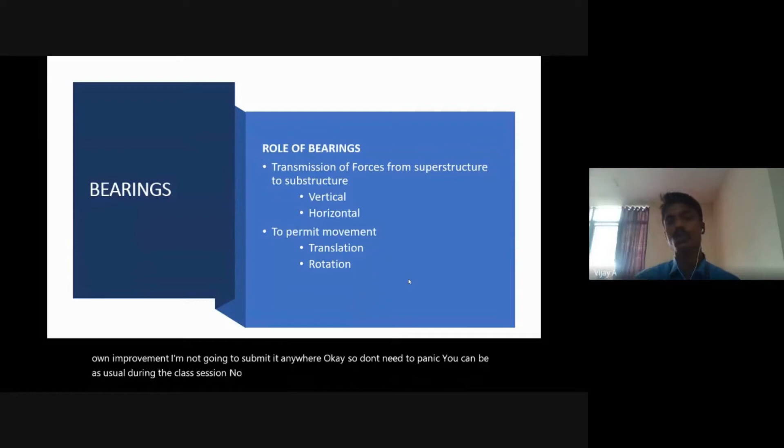The role of bearings is transmission of forces from superstructure to substructure. Here the bearing acts as an intermediate between your girders and the piers. The bearings can be placed vertical or horizontal, and it helps in permitting the movement of your girders in translation or rotation.

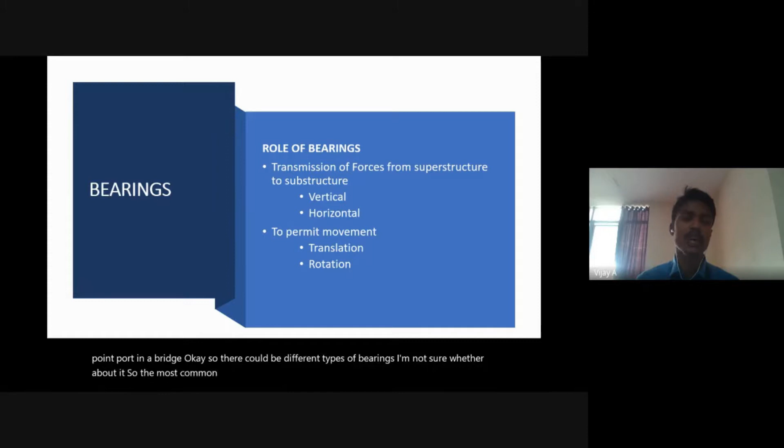This is actually one of the most important parts in a bridge. There could be different types of bearings. The most common types we use in bridge structures are sliding bearings, roller and rocker bearings, elastomeric bearings, and the recent advanced bearing is PTFE, polytetrafluoroethylene. It's a type of rubber which has a very good ductile content in it.

Elastomeric bearings are used in other structures as well, especially for base isolation. These are the different types, and oil bath bearings are not used in current infrastructure methods. So now, inspection of bearings.

These are very important points that you must be knowing. The inspection of steel bearings is very important in regular maintenance of bridges, especially steel bridges, because when corrosion takes place at girder level or deck slab level, it is obviously going to affect your bearings as well.

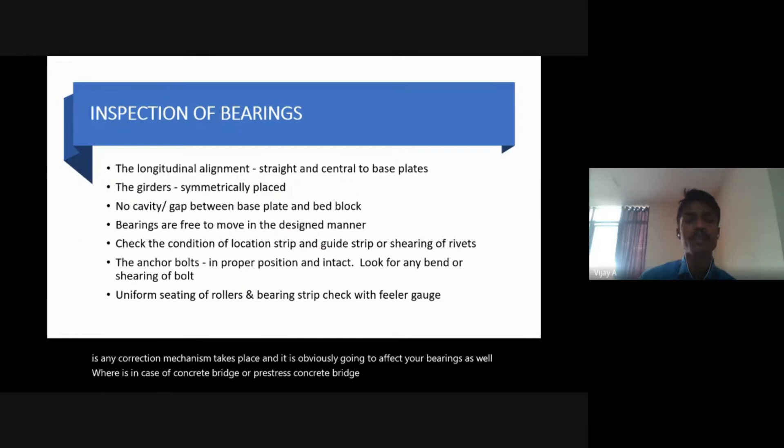Whereas in case of concrete bridge or pre-stressed concrete bridge, the bearing is a different material, whereas your girders and piers are made up of different composites. That will of course have an effect, but comparatively to your steel bridge where both bearings and girders are made up of steel and integrated together, so at that point the cost will be very large.

Particularly, the bearings of all girder bridges should generally be cleaned and greased once in every 2 to 3 years. It's not beyond 2 years, at least for 2 years you have to check and maintain.

In case of a bridge that carries long welded rails, when you go for uniting two different rails or two different girders, in that scenario we will be using long welded rails, we call it LWR. At that point, the sliding bearing shall be inspected, especially during March when the summer season is about to start, and during October when the winter season is about to start.

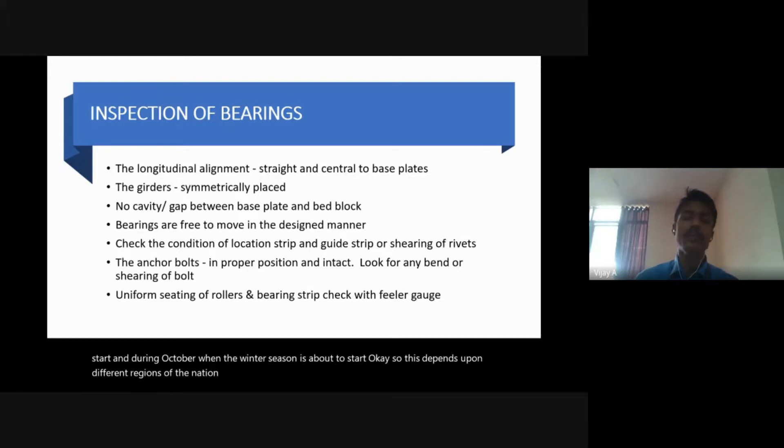This depends upon different regions of the nation. Any foreign materials available in the bearings must be cleaned, and then you have to apply for greasing. The lubrication of the bearing shall be done once in 2 years.

Especially for railway bridges, we have an organization called RDSO, Research Design and Standards Organization. It is an R&D organization that comes under the Ministry of Railways of India, which functions as a technical advisor and consultant to the Indian Railways. For example, in India we have a separate organization called BPRD, Bureau of Police Research and Development, which takes care of modernization of police forces.

What are the different reforms that has to be done? We have a dedicated police force, and a team to monitor different types of weapons as well. But you have an institution called BPRD, Bureau of Police Research and Development, which takes care of modernization of the police force.

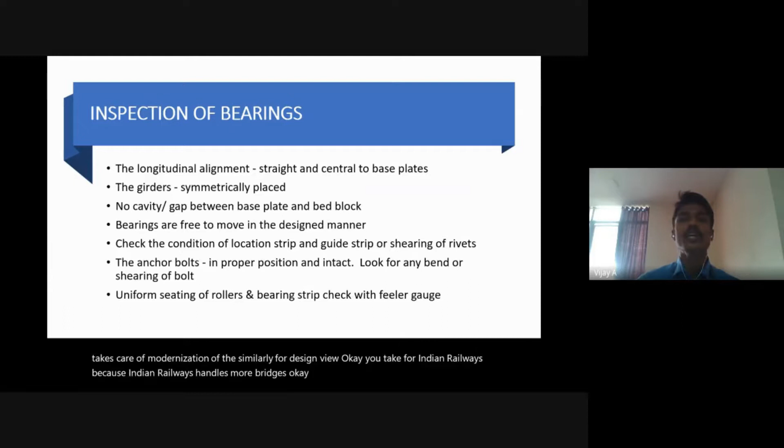Similarly, for Indian Railways, because Indian Railways handles more bridges, especially steel bridges, they have their own organization called Research Design and Standards Organization. This organization frames different policies, especially structural design policies, bridge maintenance and rail maintenance policies that help the Indian Railways. So bearings must be taken care of as adhering to RDSO principles.

Sliding bearings should be inspected for major reasons like oiling and greasing of bearings, which must be required to be done at least once in 2 years to ensure proper functioning.

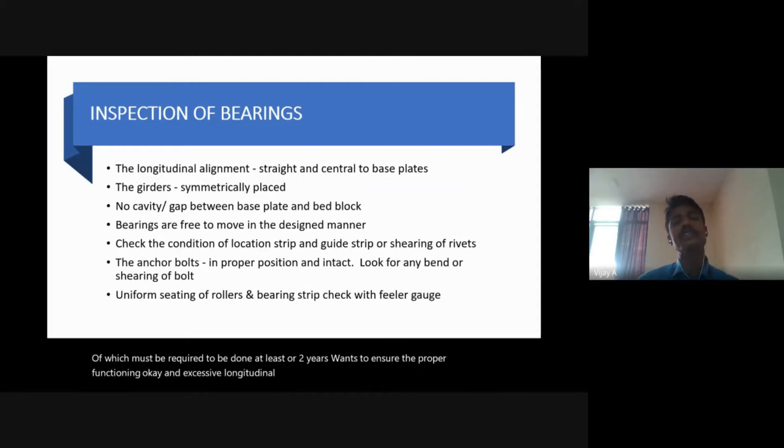Excessive longitudinal movements of the superstructure result in shearing of location strips as well as anchor bolts that connect the base plate.

In such cases, we sometimes use phosphor bronze sliding bearings, which are periodically used especially for hill regions where rails made of steel are connected through timber sleepers. In case of concrete and timber sleepers, the behavior and effect between railway rails and the sleeper differs depending on the material content.

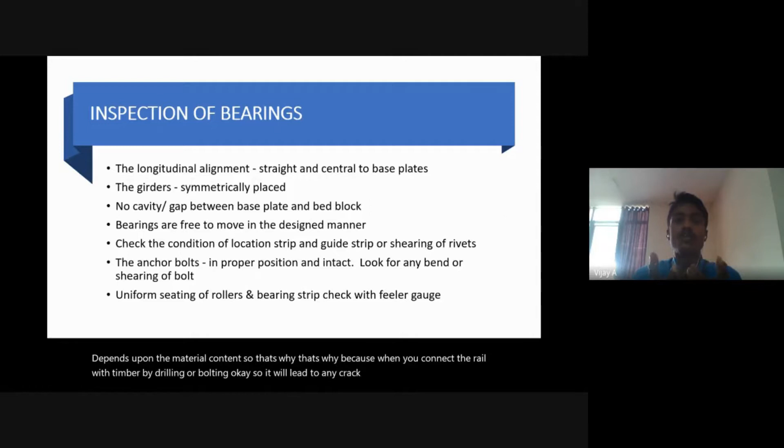In case of timber, connecting the rail by drilling or bolting can lead to cracks or enlarged openings in the timber, which leads to water percolation or penetration. In such scenarios, we use phosphor bronze sliding bearings, which, in case of any cracks, get well compacted such that they get sealed off. This kind of bronze sliding bearing is used as per RDSO principles.

Many times a uniform contact between the bottom face of the bed plate and top surface of the bed block is not ensured, resulting in a gap at certain locations of the railway bridges. This leads to transfer of excessive impact forces to the bed block under live load, and may lead to crack and crushing of the bed block under the masonry constructed underneath the bridges, especially arch type bridges.

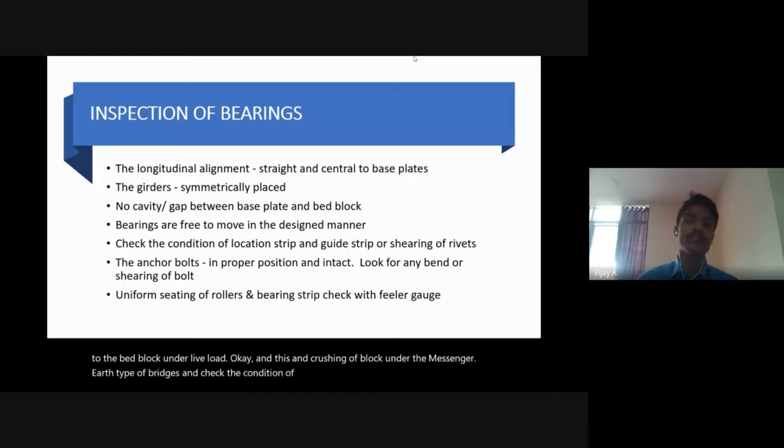Check the condition of the location strip and guide strip, or shearing of rivets, and the anchor bolts for proper position and intactness. Look for any bend or shearing of bolt, and then uniform seating of rollers and bearing strip. Check with a feeler gauge.

In case of flat bearings, we have a different type called flat bearings. The girder is lifted a little over 6 mm. The bearing surface is cleaned with kerosene oil and a mixture of black oil, grease, and graphite in a working proportion.

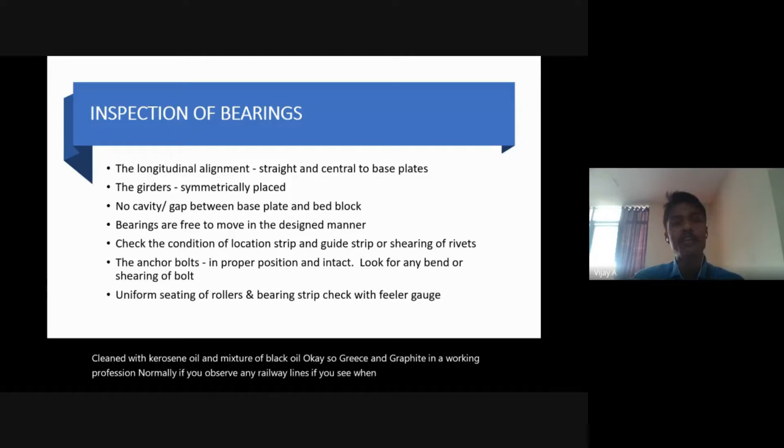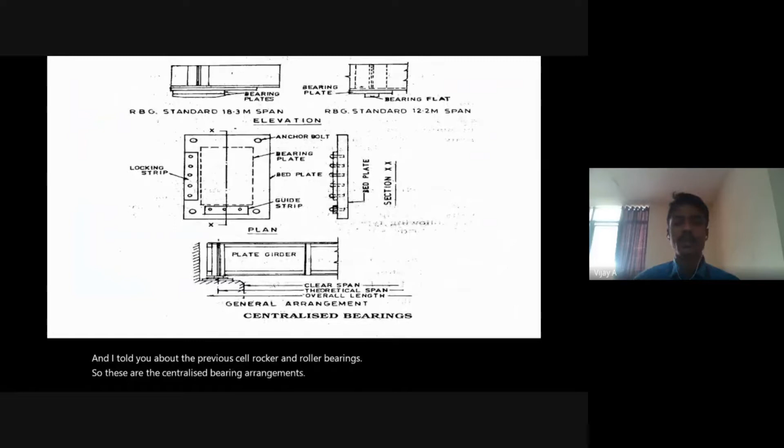As I mentioned earlier about rocker and roller bearings, these are the centralized bearing arrangements. Coming to the roller and rocker bearing, this type of bearing is lifted from its position by adequate slinging.

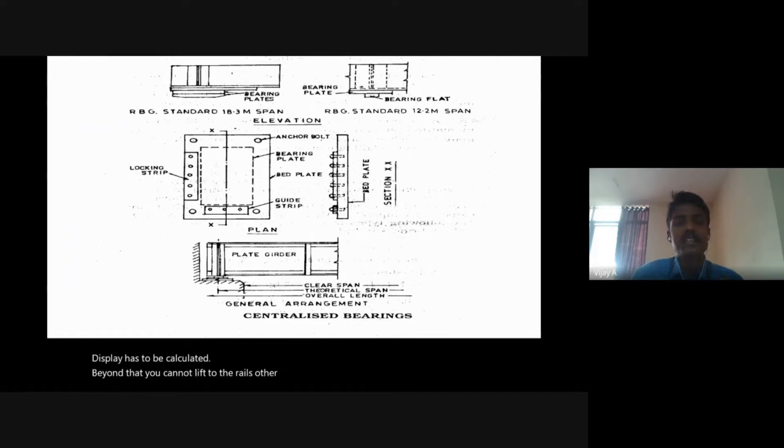Slinging means that during maintenance of such bearings, you tie a cable along the rails and lift it up to some extent so that the bearings can be changed. The lifting force and the displacement have to be calculated, and beyond that limit you cannot lift the rails, otherwise it will displace the entire configuration of the permanent way.

In that case, the bearings are scraped or polished with zero grade sandpaper, and graphite of sufficient quantity is applied evenly over the bearings or rocker and rollers to keep surfaces very smooth, before the bearings are lowered back to their original position.

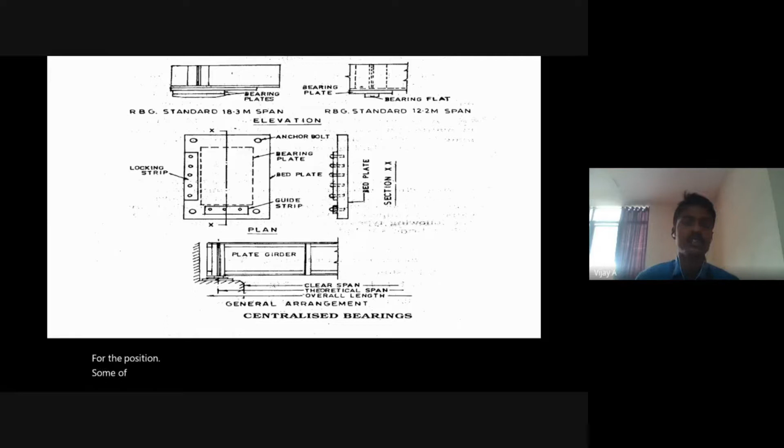We have certain pins, for example in some steel structures, especially at cycles or at home, at the end of a bolt like in ceiling fans, you can see what we call knuckle pins. During constant or consistent dynamic loads, the bolt may get loosened and there are possibilities it may come out. In such scenarios, we use knuckle pins at the end of the bolt.

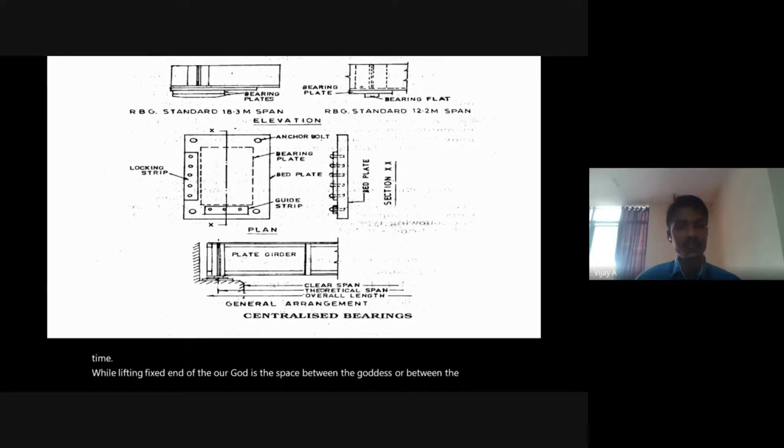We insert a spring within the bolt through a hole, and that is called a knuckle pin. The knuckle pins of both free and fixed ends should also be greased at the time. While lifting fixed ends of the girders, the space between the girders or between the girder and ballast wall at the free ends should be jammed with wedges. This is a very important point.

This is called a slinging operation. When you lift the girder or bearing for maintenance, in some scenarios you will not be lifting it more than 10 mm.

So when you lift it for 10mm, immediately you should not let the crane completely hold it. You should put a wedge underneath. These ends should be jammed with wedges to prevent any longitudinal movement of the girder, right?

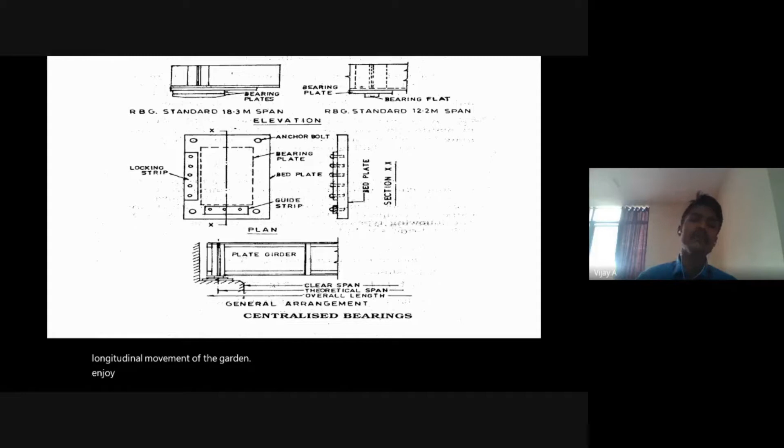In case of segmental rollers, you can observe them in the end joints of the girders. These segmental rollers should be seen placed vertically at mean temperature. This is very important.

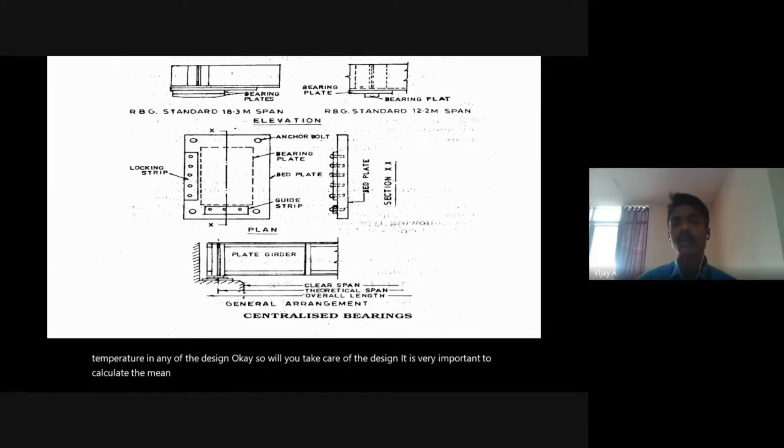In most design cases, we fail to include the mean temperature in the design. So it is very important to calculate the mean temperature. Mean temperature is nothing but, for a particular location, for example if you are going to construct a foot over bridge at Potheri railway station, you have to take the mean temperature of that location for the past 100 years. Based upon the mean temperature, we apply it to the structure and calculate the thermal stresses.

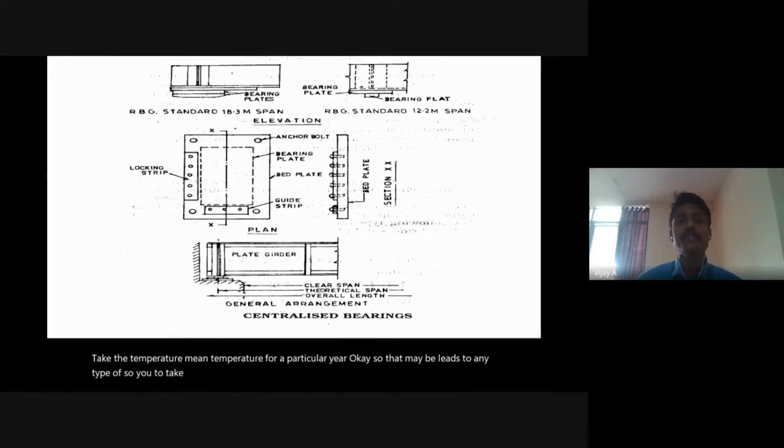This is how the design must be worked out. So this is a point I wanted to tell you. When you calculate thermal stresses, you don't just take the mean temperature for a particular year, as that may lead to failure. You have to take minimum, maximum, as well as average mean temperature for your design consideration over the past 100 years. That is why we require to calculate mean temperature. This is common for any type of structure, not only bridges.

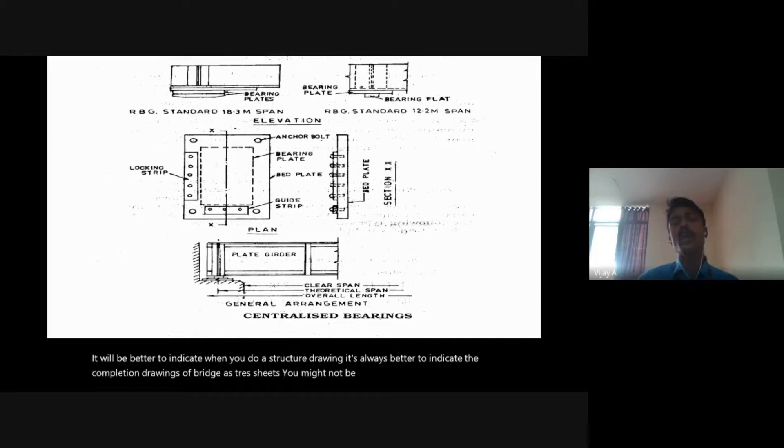It will be better to indicate, when you do a structural drawing, it's always better to indicate the completion drawings of bridge stress sheets. You might not have heard about this kind of sheets. As a structural engineer, when you go into the field, we take care of AutoCAD drawings where we draft the building structure, plans, sections, and then we go for structural drawings where we give detailing and all.

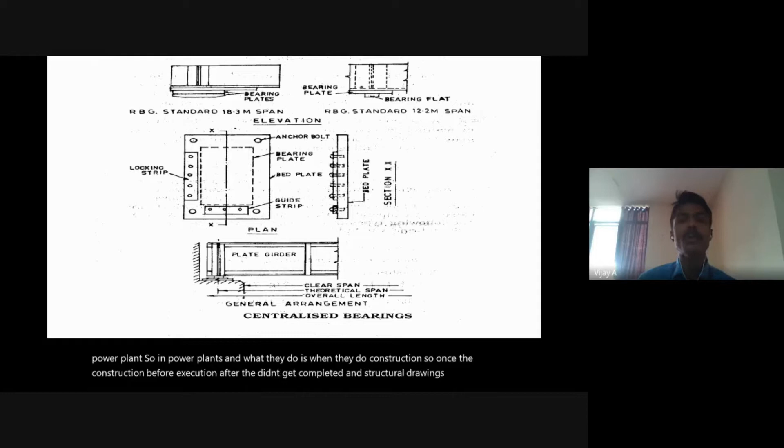In infrastructure based projects, I came to know about these stress sheets from a project at Kudankulam nuclear power plant. In power plants, once the construction design gets completed and structural drawings are drafted, before execution they immediately go for stress sheets. What a stress sheet does is take all the critical locations of the structure, and for that structure they reflect the shear force and bending moment at different points for actual live load and for accidental loads. These are called stress sheets.

Here you can see, at the bottom of the plate girder, the clear span, the theoretical span, and overall length. So can any of you tell what is clear span and what is theoretical span?

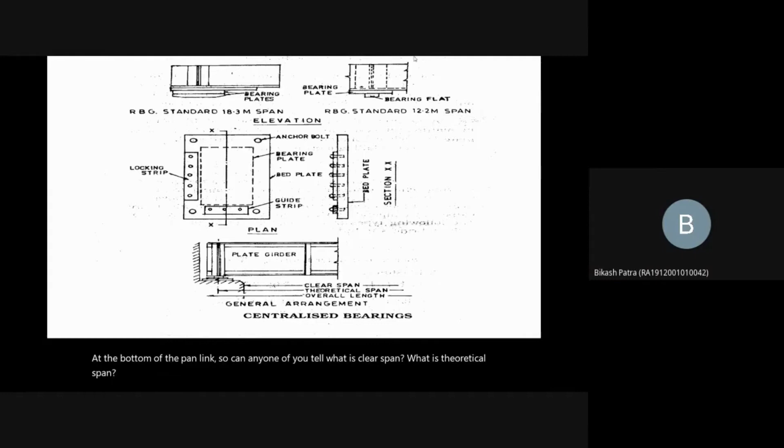Clear span is from one abutment to another abutment midpoint, you can say. Theoretical span is from abutment midpoint to another abutment midpoint. That's correct.

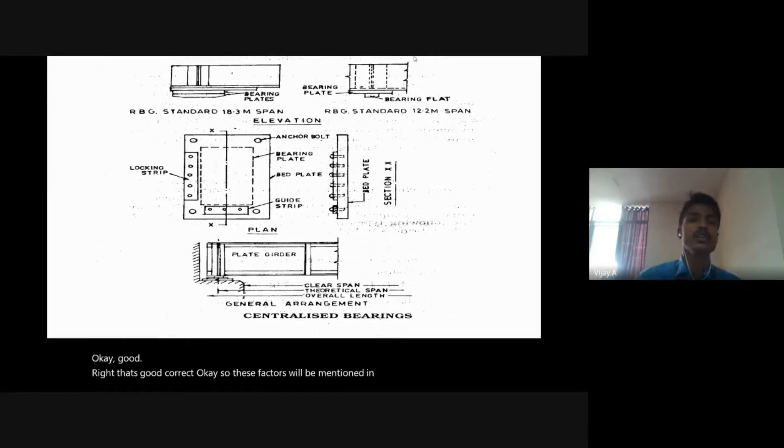These factors will be mentioned in your stress sheets. You will be calculating from midpoint to midpoint and how it reacts for live load and additional accidental loads. Then we take it from one end to another end, and at that point, how the girder reacts. So these kinds of scenarios will be taken care of. That is where we concentrate on stress.

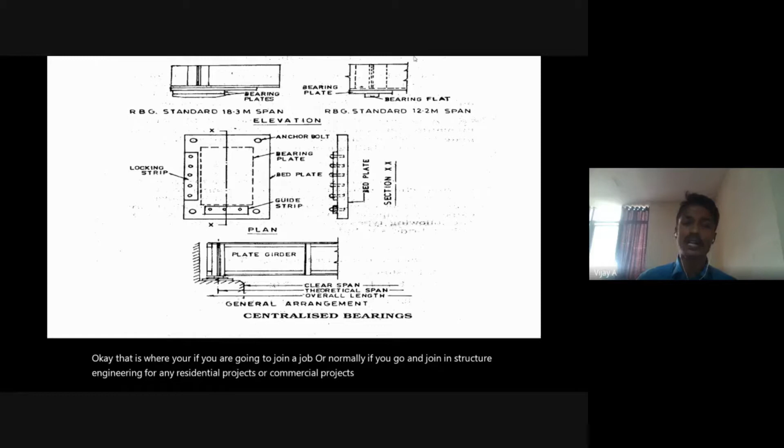Suppose even after your M.Tech in structural engineering, if you go and join a job for residential or commercial projects, in that scenario I guess you may not be exposed to stress sheets. But when you get into infrastructure based projects, especially bridges, nuclear reactors, or telecommunication tower construction, in that scenario you will be very well exposed to stress sheets.

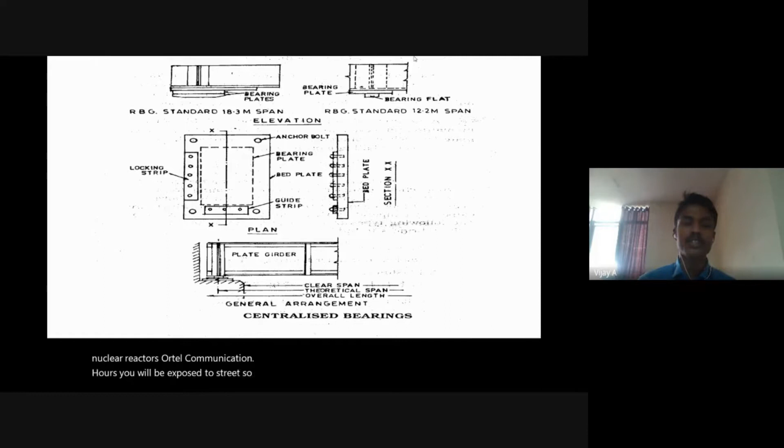So keep in mind that the span mentioned in stress sheets will have both clear span reactions as well as theoretical span reactions. Then you have to take care of the maintenance of arch bridges very effectively, because in most railway bridges we take care of arch bridges.

Okay, so these are the different components of arch bridges. I will explain the maintenance of these arch bridges, and then again I will come to different types of bearings because I told you about PTFE bearings and all. You should know about what are PTFE bearings, what are elastomeric bearings, and what are its functions. This kind of things you must be knowing.

Coming to arch bridges, most of them are very old. In fact, in India in current scenario, we actually go for pre-stressed girder bridges or steel girder bridges, and sometimes suspension cable bridges where long span is required. For arch bridges you require more skillful labor in constructing the arches and all. That is why we avoid such kind of bridges in infrastructure.

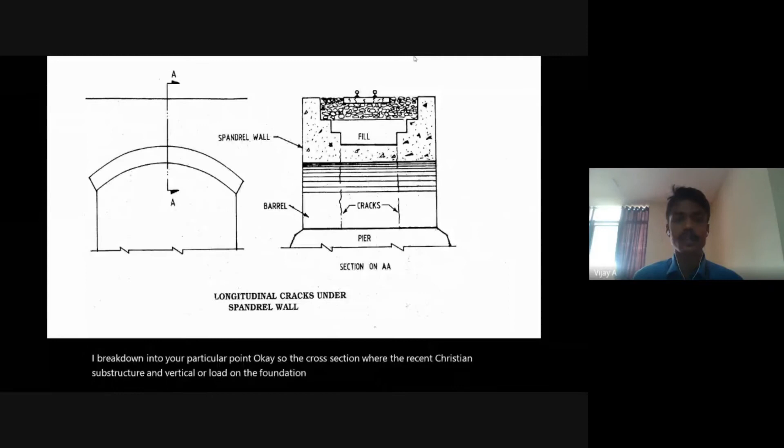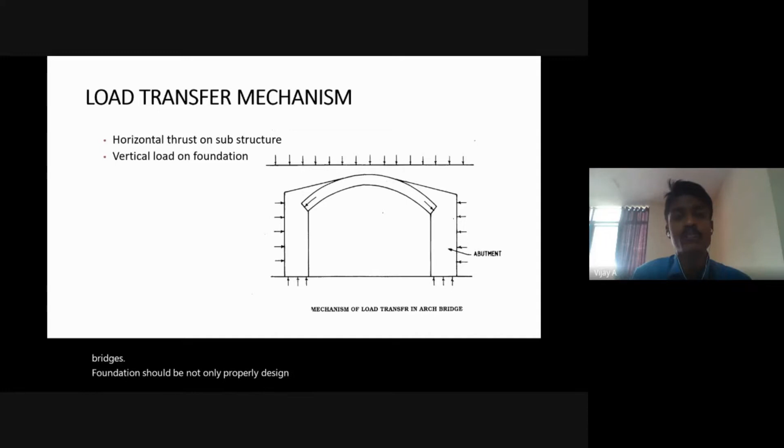From this figure, you can easily conclude that soundness of foundation is extremely important in arch bridges. Of course, foundation is very important for any building, but in case of arch bridges, the foundation should not only be properly designed, but also the material used for construction of the foundation must be very sound. This fact must be borne in mind not only during inspection but also in executing work such as jacketing of piers and abutments of arch bridges.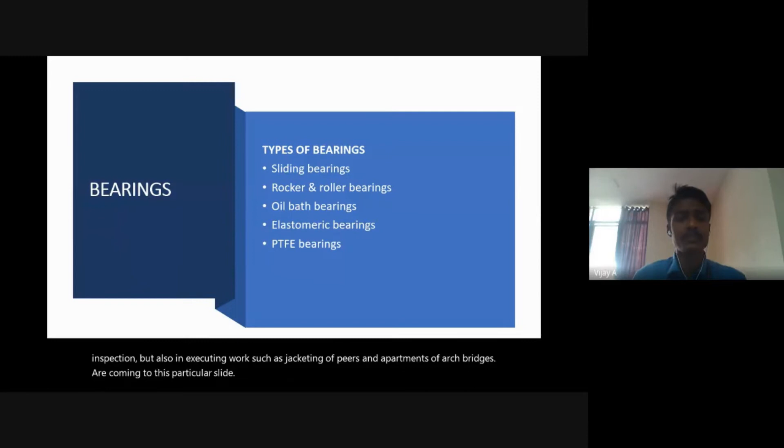Coming to this slide, you have various types of bearings, and as a structural engineer, you should be aware of what these different bearings take care of. Coming specially to elastomeric bearings, as I said, these we will be using in base isolations, right?

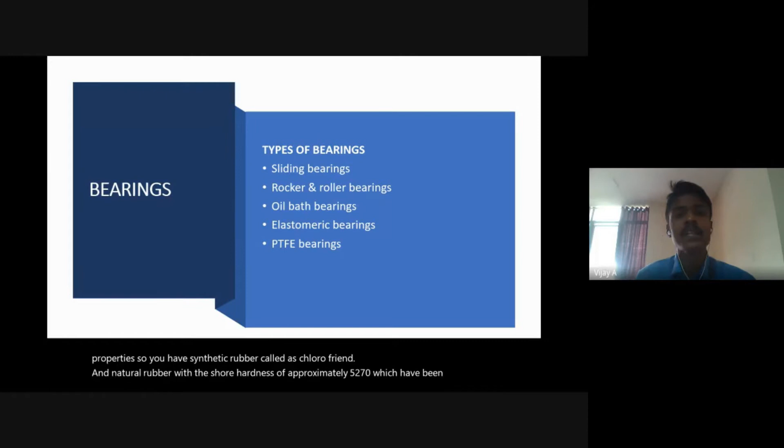These elastomers are nothing but polymers with rubber-like properties. So you have a synthetic rubber called chloroprene and natural rubber with a Shore hardness of approximately 50 to 70, which have been extensively used in bridge bearings. Elastomers are, in fact, very stiff in resisting volume change, but also very flexible when subjected to shear or pure uniaxial tension. This is a very important point, guys.

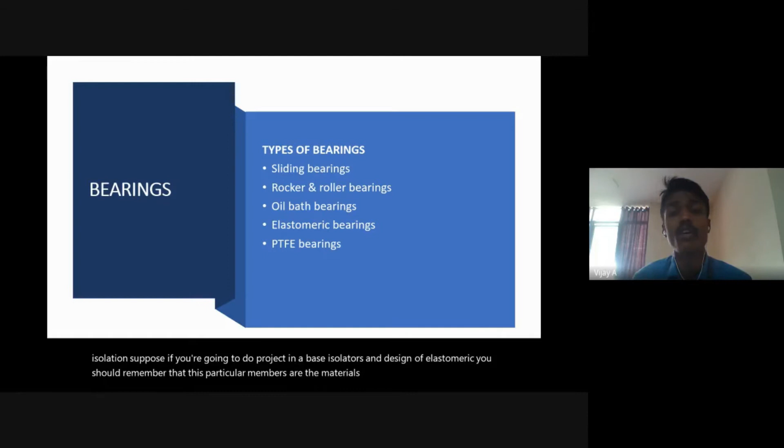Please note, even for base isolation, suppose if you're going to do a project involving base isolators and design of elastomeric bearings, you should remember that this material, the elastomer bearing, has the capacity of very stiffness in resisting volume change. That is why in case of earthquake, it acts as resistance to inertial loads, right?

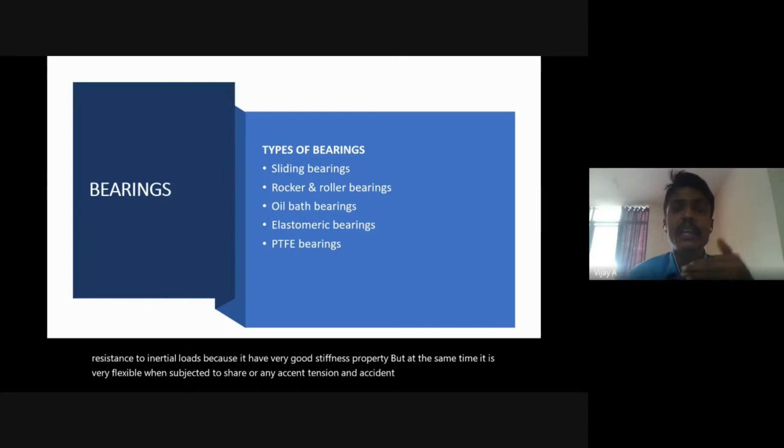Because it has very good stiffness property, but at the same time it is very flexible when subjected to shear or uniaxial tension. So in case inertial forces and accidental loads act simultaneously, it has the capacity to transfer both types of loads at a single time.

Most elastomers are stiffened drastically at low temperatures. Natural rubber stiffens less than chloroprene. Elastomers actually creep under continuously applied stress and are subject to deterioration due to high concentration of ozone or severe chemical environment.

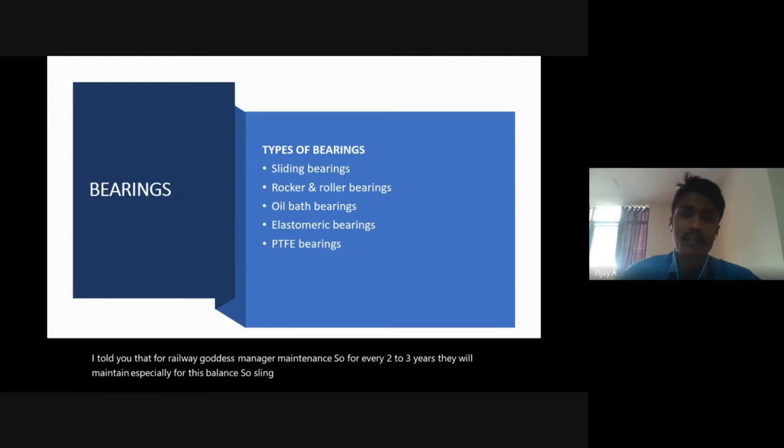That is why I told you that for railway girders, maintenance is done every 2 to 3 years, especially for these bearings. So a slinging operation will be done. We will keep wedges, check for any stresses or deterioration in the bearings, either remove it or repair it, and then release the slinging. This is how you have to maintain the elastomeric bearing.

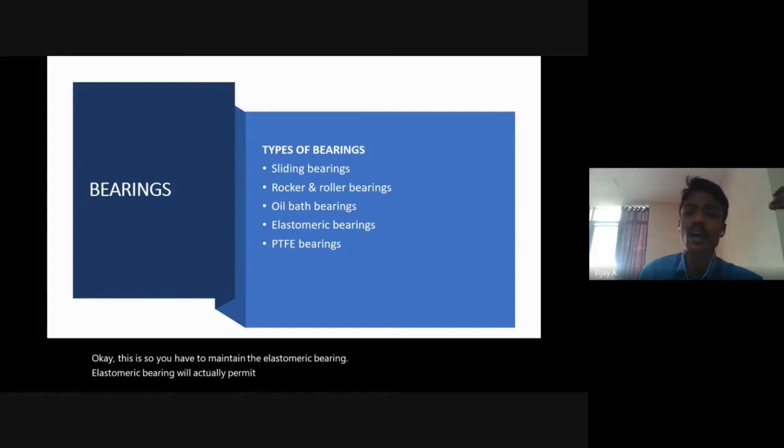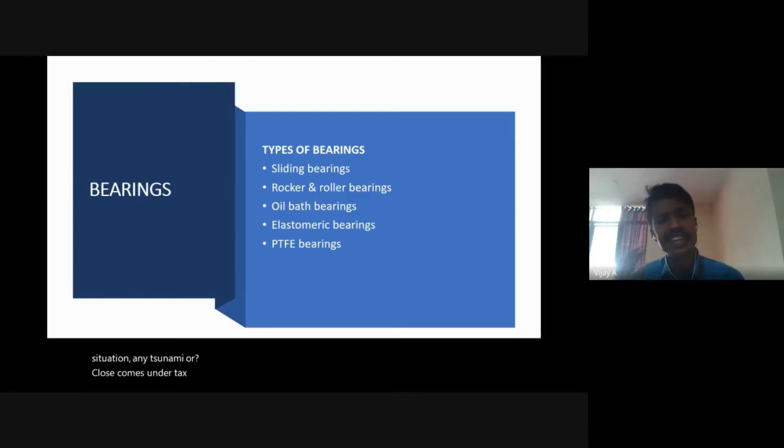Elastomeric bearing will actually permit you to translate along any direction and rotate around any axis. Suppose you imagine a column that connects the foundation and the base of a structure—sorry, the footing and the base of the structure. Between them you are placing an elastomeric bearing. In that situation, in case of earthquake or tsunami or vibration loads attacking the structure, in any direction it has the capacity to transfer the loads.

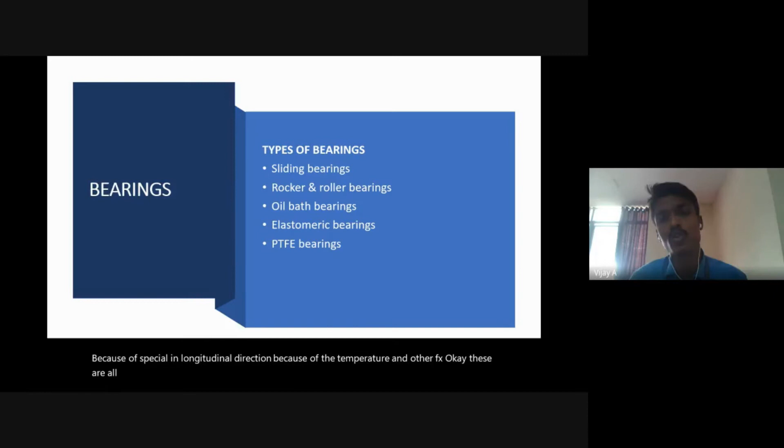The longitudinal movement of the bridge deck due to temperature and other effects is also accommodated up to a certain limit by the shear deformation of the bearing. So when we talk about expansion joints and consider thermal stresses, the girders may be allowed to move, especially in the longitudinal direction, because of temperature and other effects. These are all possible only because of the bearings we use in the structure. Especially elastomeric bearings help very well in transferring the shear deformation caused by these longitudinal movements.

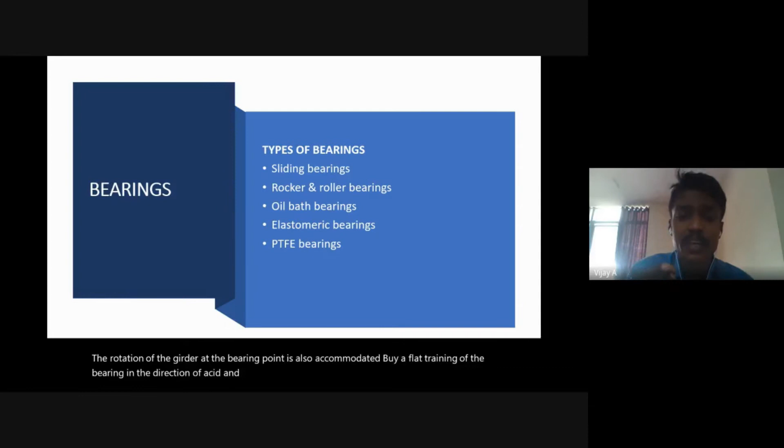The rotation of the girder at the bearing point is also accommodated by a flattening of the bearing in the direction of rotation. As I said, it has very stiffened characteristics, and at the same time very flexible characteristics for shear or uniaxial tension. So when rotation of the girder at the bearing point acts on the bearing, it gets flattened in the direction of rotation.

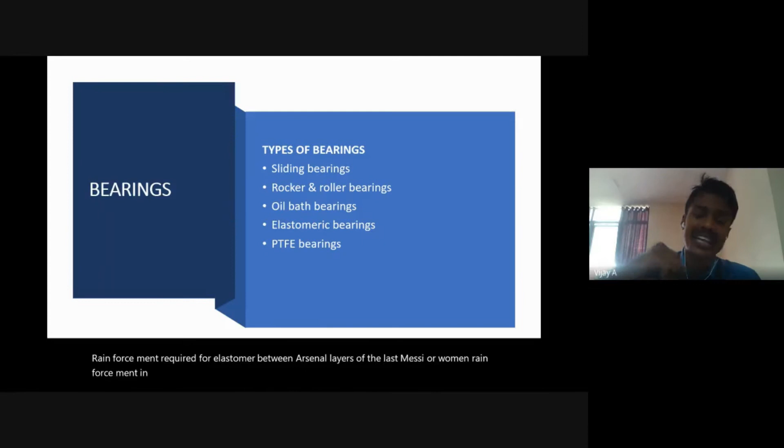So reinforcement may be required—you may provide reinforcement for elastomers between horizontal layers of the elastomer. When I mean reinforcement in elastomeric bearings, we are not going to give any reinforcement bars within the bearings. Instead, we will be using steel reinforcing plates to prevent any outward bulging or splitting under load. The reinforcement for elastomers is required between the horizontal layers.

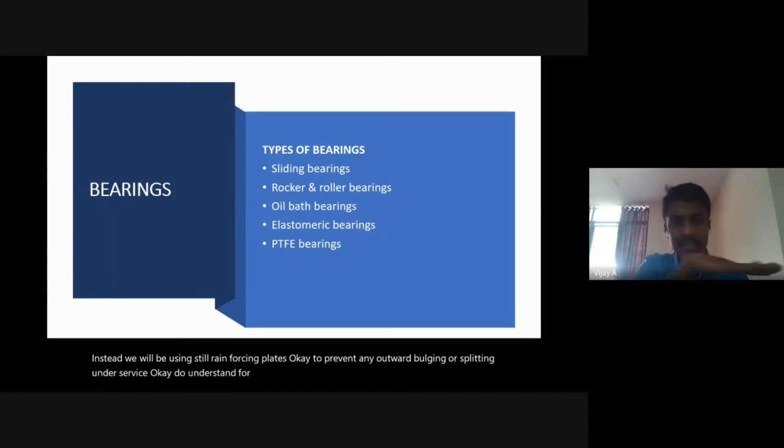Horizontally, if you take the bearing, you will be inserting steel reinforced plates. Why do we require this? To prevent any outward bulging. Suppose it is made up of stiffened rubber—when you apply the load and simultaneously shear force is acting, it will start bulging out; the expansion of rubber takes place. So we use such steel reinforcing plates to prevent any outward bulging or splitting of bearings under service load.

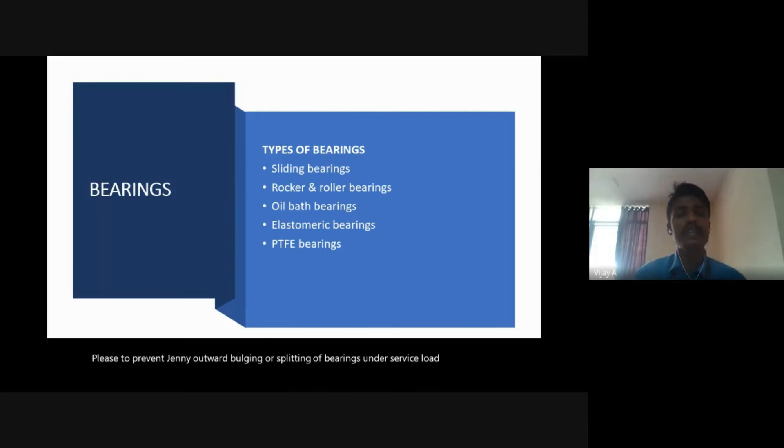The design of elastomeric bearing takes into account the dimensions of the bearing through a term called the shape factor. We have all studied the shape factor. What is the shape factor? It is nothing but the ratio of effective plan area to the force-free surface area, right?

The low values of shape factor should be avoided, since bulging and low elastic modulus are likely to occur in that scenario. When you design elastomeric bearings, if the shape factor is low, you have to avoid that particular design because it will lead to bulging and a very low elastic modulus.

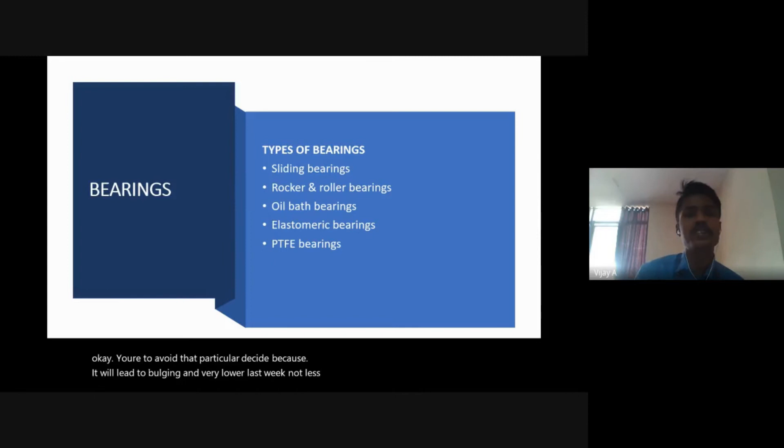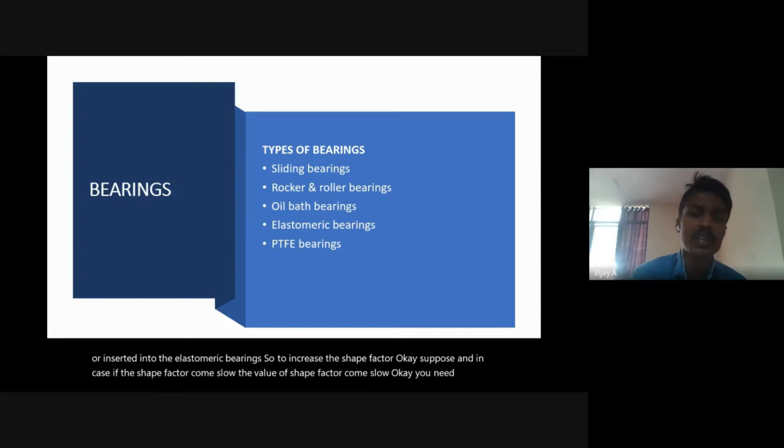Then you'll have closely spaced steel plates inserted into the elastomeric bearing so as to increase the shape factor. So suppose when you design the elastomeric bearing and the shape factor comes out low, you need not discard the design and go ahead with another trial. Instead, you can take into account reinforcement provided in the elastomeric bearing—in that rubber bearing, you can insert steel plates, maybe closely spaced.

This will help you in increasing the shape factor of the elastomeric bearing. The horizontal stiffness is a function of shear modulus and total thickness of the elastomer.

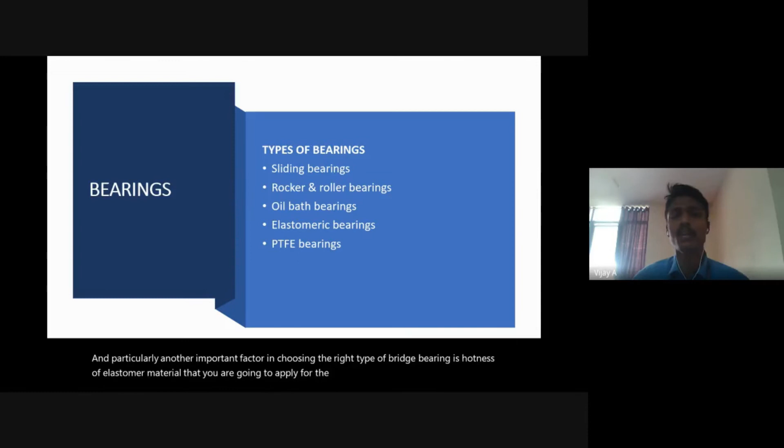Another important factor in choosing the right type of bridge bearing is the hardness of the elastomer material you are going to apply for the particular bridge structure. Every material has a hardness scale, and you have to take the higher limit. This is typically specified as shore hardness and is limited to a maximum value of 70. Higher values of the material result in bearings which are stiffer.

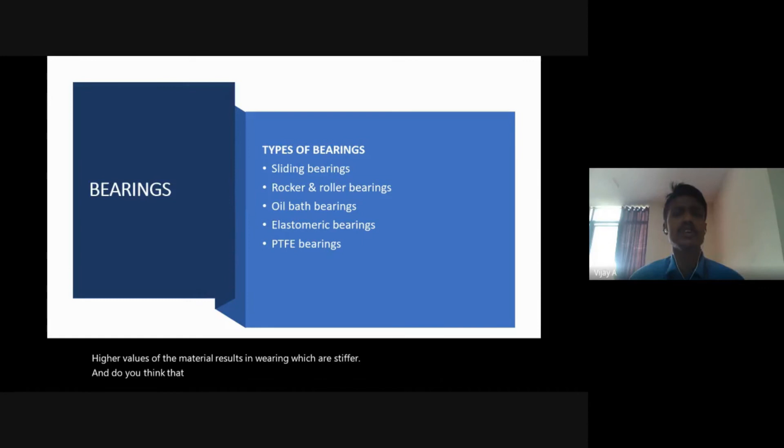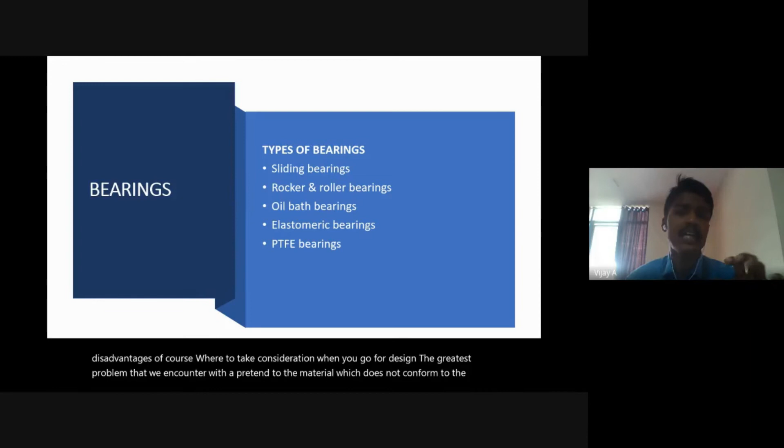Do you think elastomer bearings do not have any negativity? We do have some advantages as well as a few disadvantages, which we have to take into consideration during design. The greatest problem encountered with elastomeric bearings pertains to material which does not conform to specifications, as it may exhibit defects like cracking, splitting, bulging, or tearing of the elastomer due to continuous change in environmental conditions and temperature, since it is a highly hard and stiffer rubber.

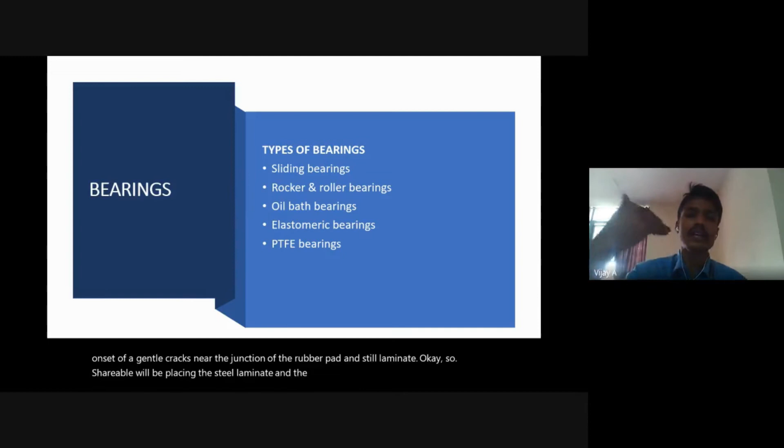The first sign of distress in elastomeric bearings is the onset of horizontal cracks near the junction of the rubber pad and steel laminate. Wherever the steel laminate and rubber pad are placed, at that junction you will have cracks. This is the very first point in noting the requirement of bridge maintenance of the bearings.

The bearing should also be examined for excessive rotation, which is usually indicated by excessive difference in thickness between the back and front of the bearing.

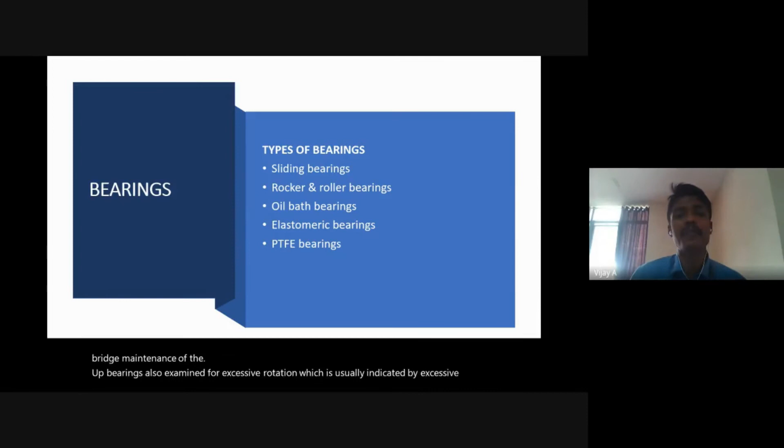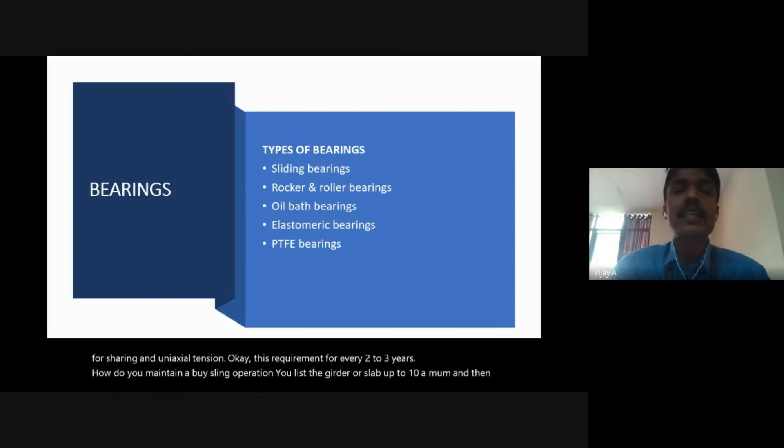These elastomer bearings require maintenance every 2 to 3 years. How do you maintain them? By a slinging operation: you lift the girder or slab up to 10 mm, then apply wedges at the ends. After that, you either go for replacement or repairing of the particular elastomeric bearing.

During the design period, when the shape factor value comes out lower, you need to insert steel plates which help in reinforcing the elastomer bearings, as this will help increase the shape factor of the particular bearing.

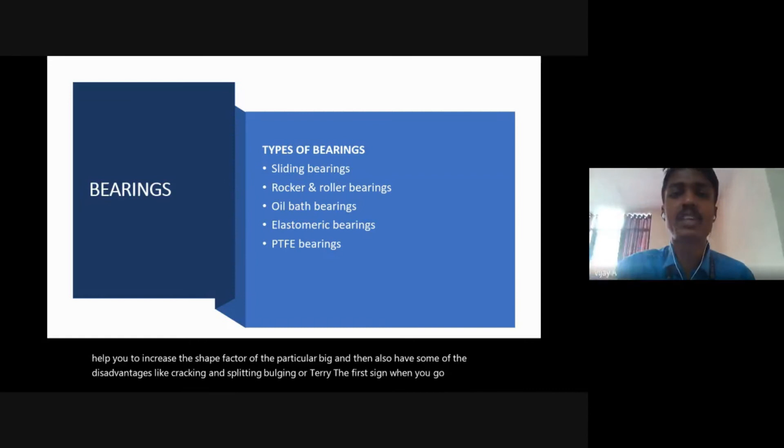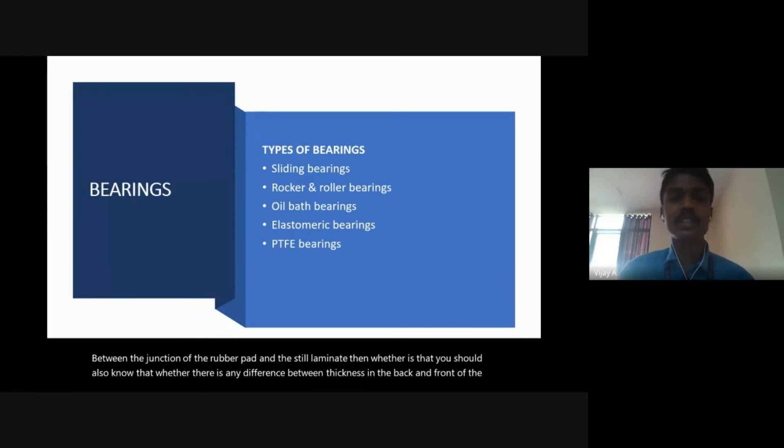Elastomer bearings also have disadvantages like cracking, splitting, bulging, or tearing. The first sign to notice during maintenance is whether any cracks have developed between the junction of the rubber pad and steel laminate, and whether there is any difference in thickness between the back and front of the bearing. These are the important things to note down.

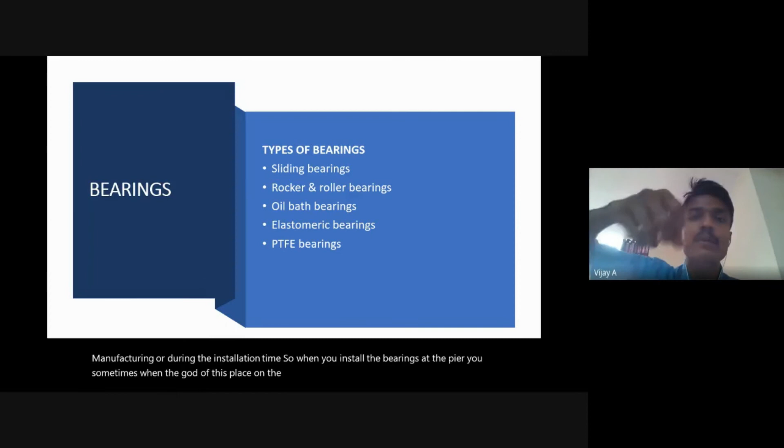Inspection and maintenance also have a few points from my experience that I want to share. Due to possible deficiencies in manufacturing or during installation, when the girder is placed on the bearings, sometimes accidentally more than the calculated force occurs when the lift is removed, so the bearings may start experiencing more stress at that point itself.

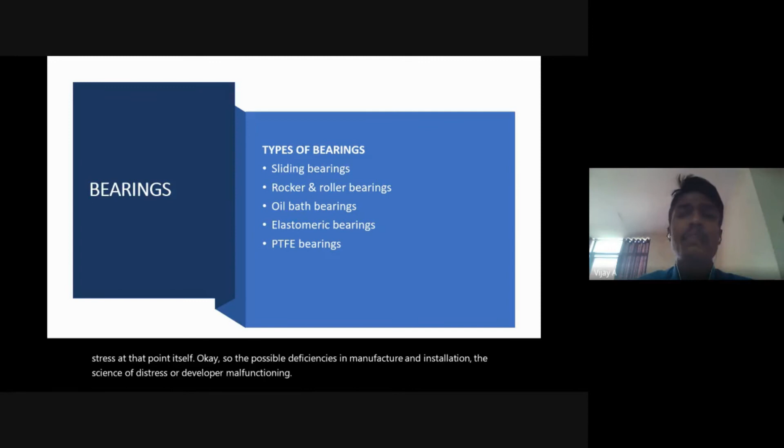Due to possible deficiencies in manufacture and installation, the bearings may show signs of distress or develop malfunctioning of the load transfer mechanism. Before any malfunctioning leads to distress in the girders or substructures, it should be detected and preventive action taken. Therefore it is necessary to undertake periodical inspection of elastomeric bearings.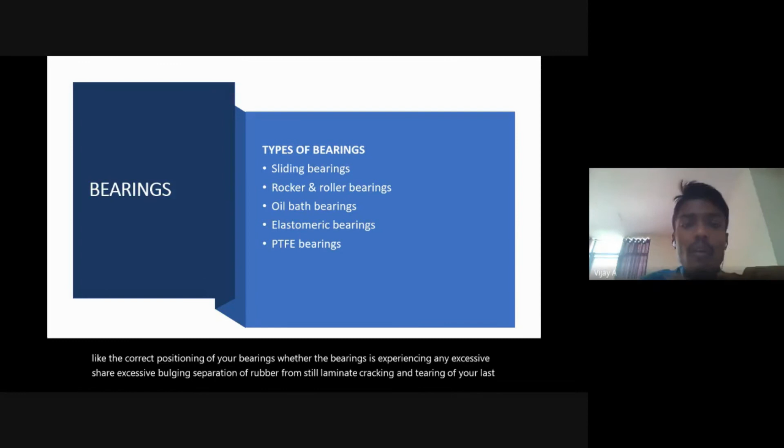The inspecting official or bridge maintenance engineer should look for important points like the correct positioning of the bearings, whether the bearing is experiencing excessive shear, excessive bulging, separation of rubber from the steel laminate, cracking and tearing of the elastomer, flattening out, or offloading at one edge due to excessive rotation.

The elastomeric bearing will undergo deformation due to load and movement of the girder. The bearing must be examined for compression, that is called flattening, as well as bulge, excessive bulging, and excessive shear.

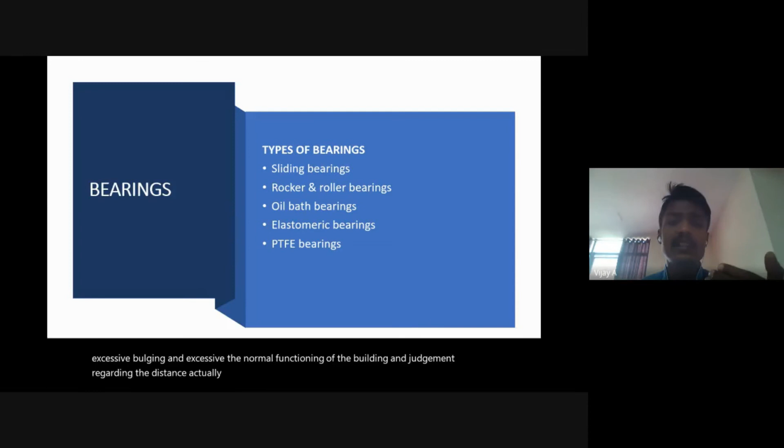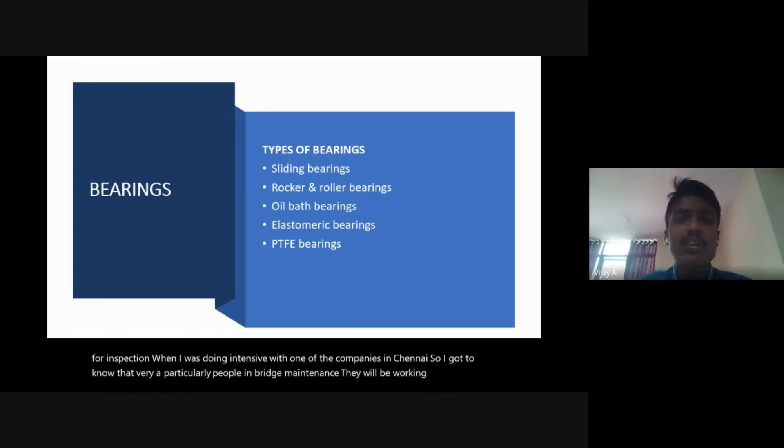The normal functioning of the bearing and judgment regarding the distress, the signs it shows, can be found only on the basis of personal experience. When I was doing internship with one of the companies in Chennai, I got to know that people in bridge maintenance work on maintenance of bearings alone, because bearings play a major part in transferring the load from the superstructure to the substructure.

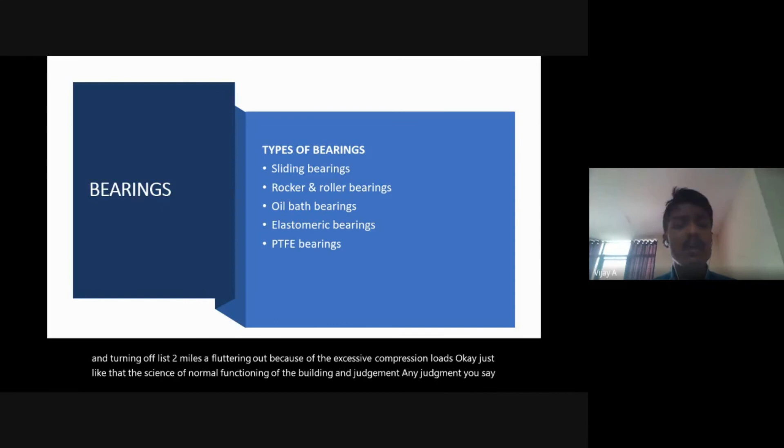So the signs include excessive shear, bulging, separation of rubber from steel laminates, cracking and tearing of elastomers, and flattening out because of excessive compression loads. Any judgment about causes of distress can be found only on the basis of personal experience and continuous improvement in oneself.

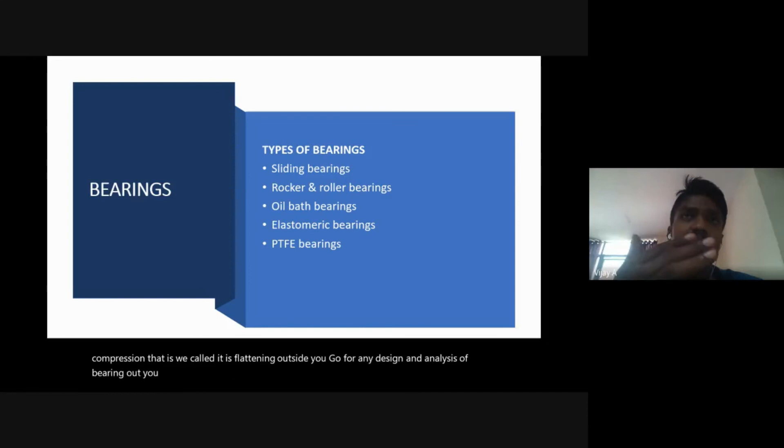As general information, the following movements shall be considered: shear deformation, rotation which leads to offloading, and compression, which we call flattening out. Normally when you go for design and analysis of a bearing, we have a term called flattening out - you don't need to worry about it much. It's just a sign that shows the distress caused by the compressive load acting on the bearing beyond the permitted loads.

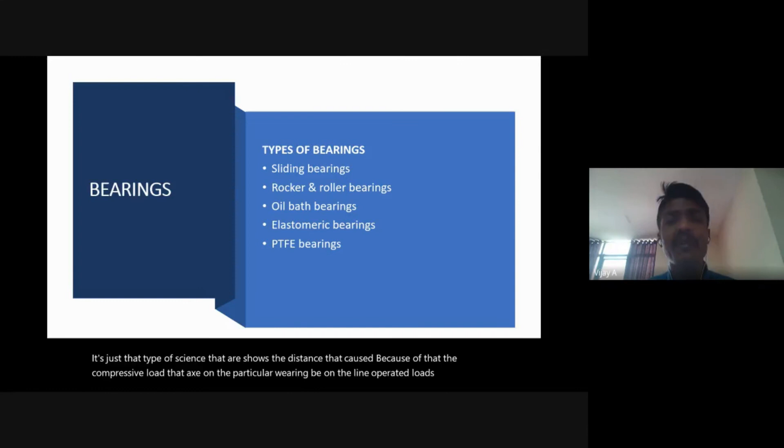Then, as I said, the advanced one is the PTFE bearing, that is polytetrafluoroethylene. For these types of bearings, whether elastomer or PTFE, you need to know about the coefficient of friction between the steel plate you are going to place and the rubber.

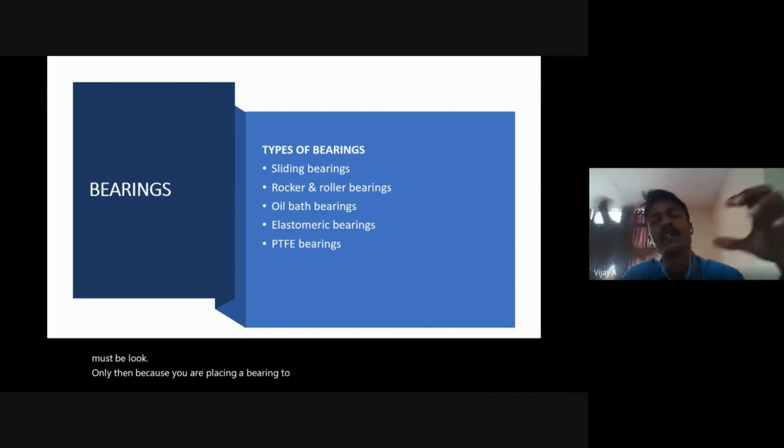This friction must be low. Only then, because you are placing a bearing to allow expansion of girders or any type of movement, translation, or rotation, the friction coefficient must always be low.

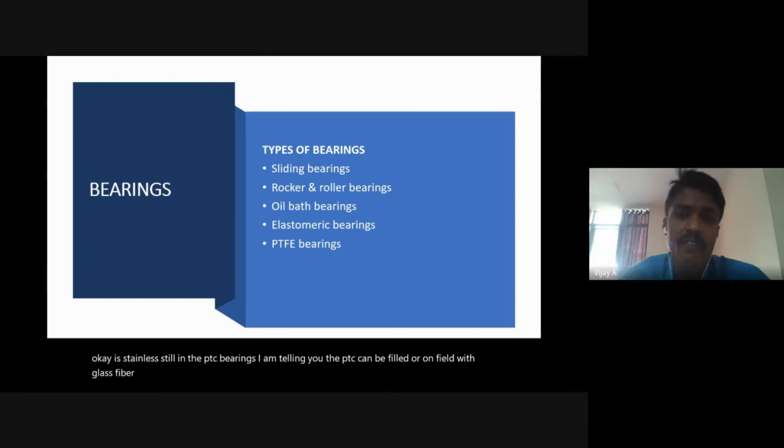The mating surface, which forms the upper component, is stainless steel in PTFE bearings. The PTFE can be filled or unfilled with glass fiber or any type of reinforcing material, whereas in elastomers you only use steel. In PTFE, which is more advanced, you can use glass or any reinforcing material, depending on the material of the girder or the design being used.

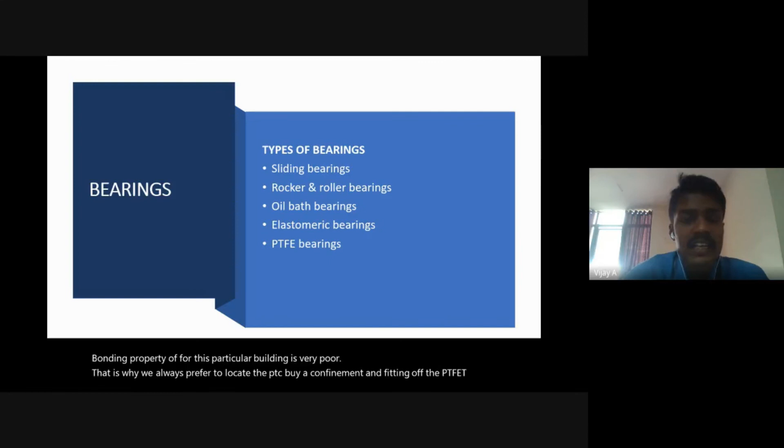The major disadvantage is that the bonding property of this bearing is very poor. That is why we always prefer to locate the PTFE by confinement, fitting half of the PTFE thickness in a recess of a metallic matrix. So even though different glass fibers or natural fibers can be included in the design, at the edges the PTFE bearing will still be locked with metallic material.

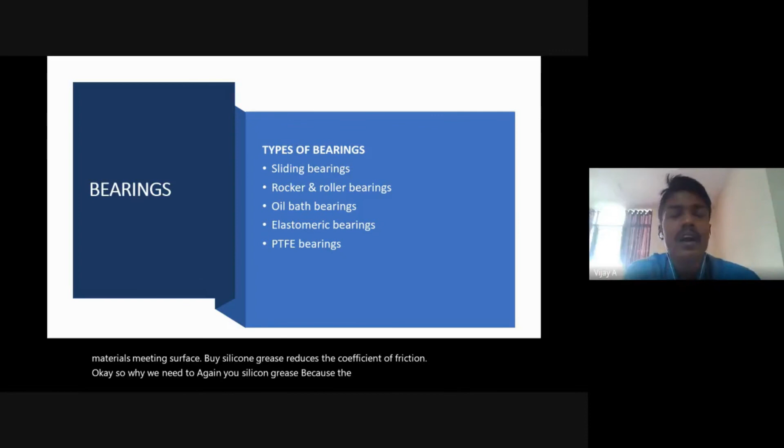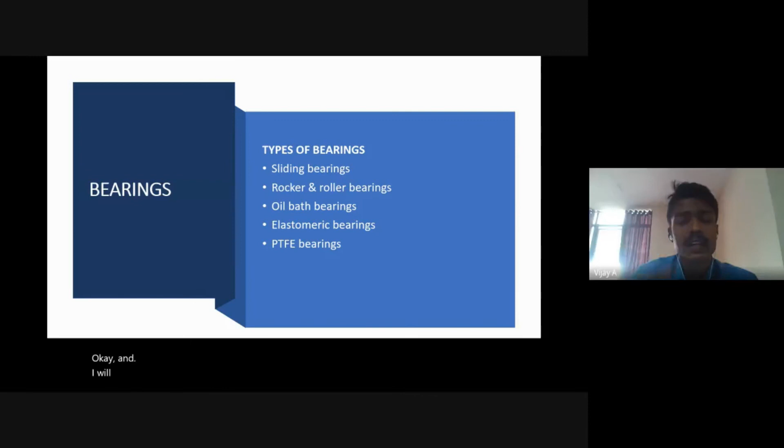Lubricating the mating surface with silicone grease reduces the coefficient of friction. Why do we need this when the material itself has a good low coefficient of friction? Because at the edges, where the PTFE is fixed and the top has a stainless steel plate, I will be locking it with steel metallic plates. So I apply silicone grease there, so that metallic plate at the edges doesn't cause greater friction or disproportionate movements to the girders.

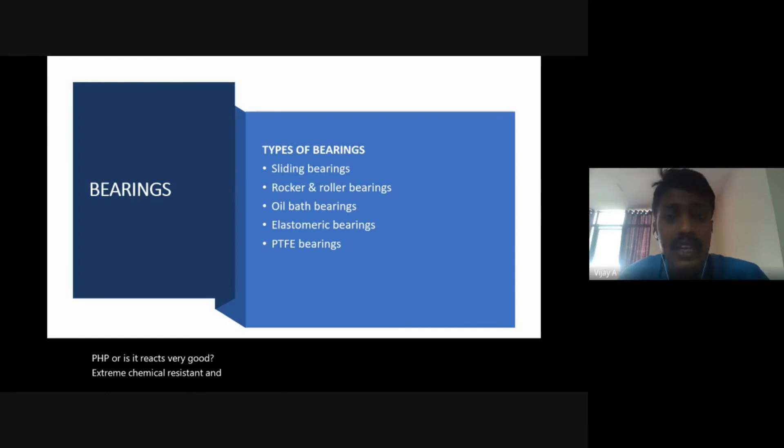PTFE is known for extreme chemical resistance, which is a very important reason why we use it. It performs very well under extreme chemical exposure and has very good dielectric properties under a wide range of working temperatures - it works under any temperature condition. Whereas for elastomeric bearings, we have to calculate the mean temperature for the past 100 days, and determine the minimum temperature, average mean temperature, and maximum temperature.